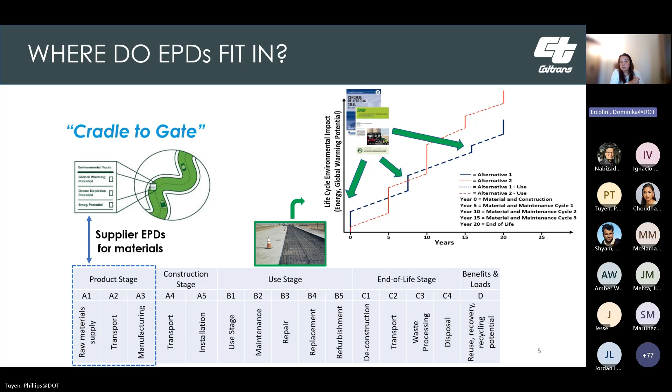And so what A1 signifies is the raw material supply. So when we're extracting those raw materials, any emissions that are related to that processing and getting those raw materials. And then we have our A2, which represents our transportation of taking those raw materials to the manufacturing and any emissions that are related to that transportation. And then we have the actual manufacturing process of those products and any emissions that are related to that. Next slide, please.

So I also wanted to talk briefly. Janesh mentioned the Buy Clean California Act. There's some similarities and there's certainly a lot of differences in what our current effort was in regards to concrete and asphalt. So the Buy Clean California Act was approved in 2017, and what this legislation requires is that the department, Caltrans, collects EPD data for structural steel, carbon steel rebar, flat glass, and mineral wool board insulation.

And so the way that we implemented this was in a phased approach where first we just wanted to see what EPDs were out there. That was phase one. Phase two, we started to require EPDs, but there was a potential option for a withhold if we weren't able to get that EPD. And now we're in full phase three, where we have limits that were set for us by the Department of General Services. So those EPDs need to meet certain thresholds.

Also, we are not allowed to install that material unless we get the EPD that meets all the requirements of the legislation. So it's like the next level to what we've done with the asphalt and concrete. So there's definitely a difference between the two efforts, but we thought it was important to share that there's this other thing. Next slide, please.

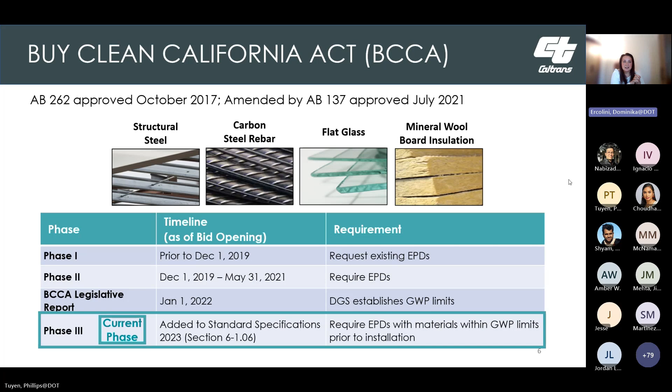So why is Caltrans interested in collecting EPDs? It's part of our goals for climate action to reduce greenhouse gas emissions, as well as be a recognized leader on climate action. And so within our 2024 to 2028 strategic plan, a couple of those strategies are to promote low carbon emission practices in project development and construction, as well as proactively collaborate with external partners to lead climate action. And so environmental product declarations are a way for us to better understand what kind of environmental impact we have through the materials that we're using. Next slide, please.

So that brings us to our current effort. So the Pavement Materials Partnering Committee Executive Committee put together a working group. This is a joint venture between the Asphalt Task Group and the Concrete Task Group, and they put together a group of professionals from the Caltrans side as well as the industry side, as Janesh had mentioned. And so you'll recognize 4 of those members are here today to speak with you. Next slide, please.

So as a group, we took various items into consideration when we were developing these specifications. One of those was the threshold quantities. And so this is actually similar to what we did with the Buy Clean California Act. Not every project requires an EPD. So those smaller projects, we are allowing them to not submit EPDs. But we also looked at the material quantities. We wanted to get as much information as we could. We were aiming for 90% of the materials. We wanted EPD data for that. But we didn't want the cost of developing an EPD to exceed 4% of the cost of the material itself. So it was kind of a balancing act, and we used data from previous projects as well as our industry partners to balance that out.

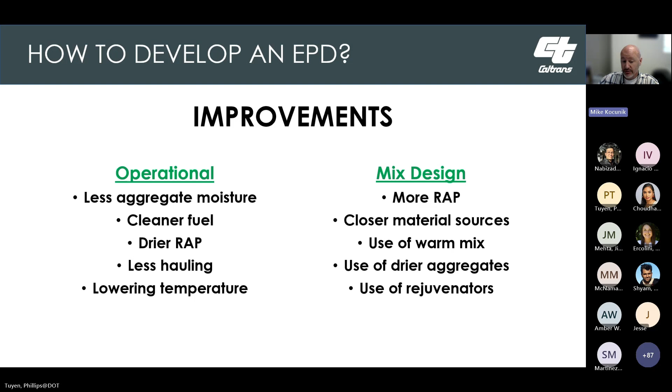So I'll be talking to you about how to develop a concrete EPD. Again, this is going to be a high-level process, as once you do start developing an EPD, you'll have plenty of resources at your disposal to help develop one. So your first step is to define your goal and scope. So make sure you understand what units of measurements you're dealing with and your system boundary. For Caltrans, the system boundary that they're looking for in their EPDs is a cradle to gate system. Again, cradle is where material is being extracted, and gate, for our reference, is your concrete plant where the material is being mixed.

Next, you will choose your EPD developer, also referred to as an LCA, life cycle assessment company. For concrete, we have two options. We have WAP and Climate Earth. And on the asphalt side, we have the Emerald Eco Label. And they will walk you through the PCR that applies for you.

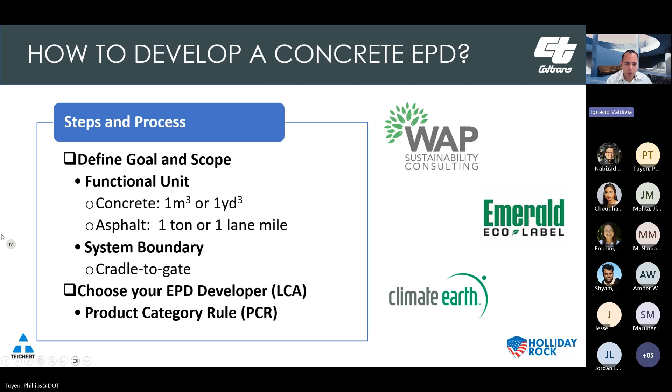The next step is to collect your primary data. So we'll start off with plant operations. This is collecting your fuel and electricity consumption. Then we collect transportation. This is the hauling distance for your raw materials. And then we move on to collecting all your suppliers. This could be cement, binder, SCM, aggregates, to name a few.

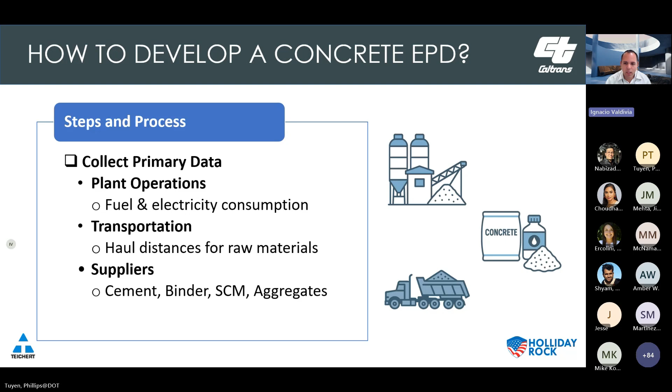Once you have collected that information, your EPD developer will send your information to be third-party verified. Once the information is verified, then you're able to publish. For our company, we use NRMCA as our publishing company for concrete, and the Emerald Eco Label for asphalt. We also have access to EC3, and the newest database, and why we're here today, is our Caltrans database.

So this is an example of the first page of our EPD. The EPD consists of 5 pages, but the first page consists of the majority of the information that you'll be plugging into the database, which we'll walk through in the next couple sections.

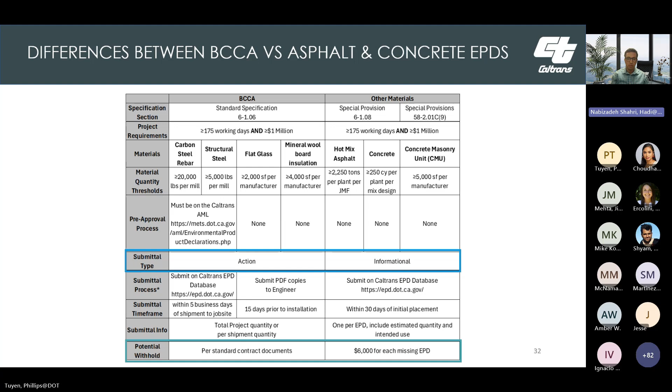Also, as I explained in the previous slide, there will be a $6,000 withhold for each missing EPD, but on the BCCA, there is no withhold. Either you meet the GWP requirements, or if you don't, per standard contract, you cannot install it. So those are the two major differences between BCCA and the new spec. Next slide, please.

Here I'm going to touch a little bit on the FHWA Climate Challenge. And I believe you have heard about that. So we understand, as Mike and Ignacio explained, publishing and getting an EPD might be challenging and require some sort of an investment. For that reason, we at Caltrans participated in 2022 in the FHWA Climate Challenge.

And as part of that program, Caltrans can reimburse concrete and asphalt plants if they go through that effort to publish and submit their EPDs. It's a partial incentive-based program, which means we reimburse $4,500 per EPD per plant, up to $18,000 per company. Basically that means 4 EPDs per company. And remember, this program will expire in January 2026.

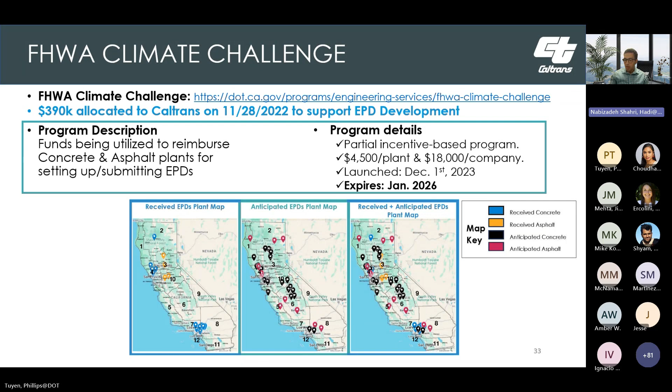So with that, next slide, please. I'm gonna give it back to Mike and Ignacio, and they're gonna walk you through the EPD database process to submit your EPDs. Mike?

Okay, let's go to the next slide, please. Okay, so let's let this stay up for a little bit. These 2 web addresses will be needed for you to input your EPDs into the Caltrans database. The first one is from DIME. You need to create a DIME account, as was said before, on dime.dot.ca.gov. Then use those credentials to log on to the EPD database at the second address, epd.dot.ca.gov. Next slide.

Okay, how to submit a new asphalt EPD. It's very, very easy. At any point, you can click on the help and support button, highlighted with that green arrow pointing to it. And from the drop down, it'll take you through anything that you're going to need. It's a very comprehensive guide, more comprehensive than the one you're going to get here in the next couple minutes, I can tell you that. So this is the first page that you'll see. Next slide.

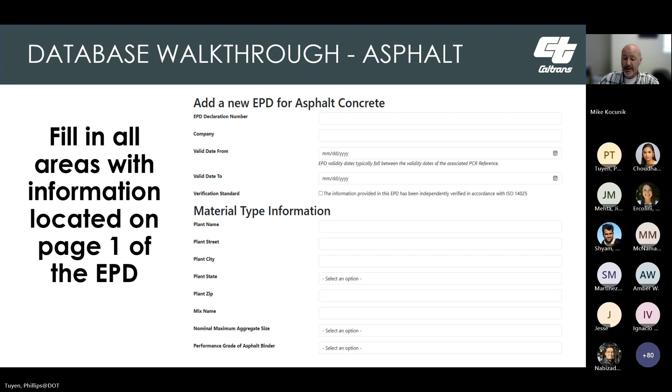This is an easy one. Choose asphalt when it says create what kind of EPD. Next slide. So what they want you to do here is just a little snippet of what kind of data they're going to be asking you for. Fill in all the areas with the information. All this stuff that you see here to the right is located on page 1 of your EPD. Next slide.

So we've talked about page 1 of your EPD. We've also talked about page 3 earlier. Page 5 of your EPD is the other very important spot, and that's where it tells you not only what your total GWP is, but where that number is coming from.

So what the database wants you to fill in, on page 5 of your EPD, is where you'll find the individual GWP numbers. And it's going to be asking you for metric, so make sure everything that you input is in metric. It'll ask you for the A1, the A2, and the A3 numbers. It'll calc that for you in the gray box that says total, and tell you that it's in the unit that's required, kilograms of CO2 equivalents.

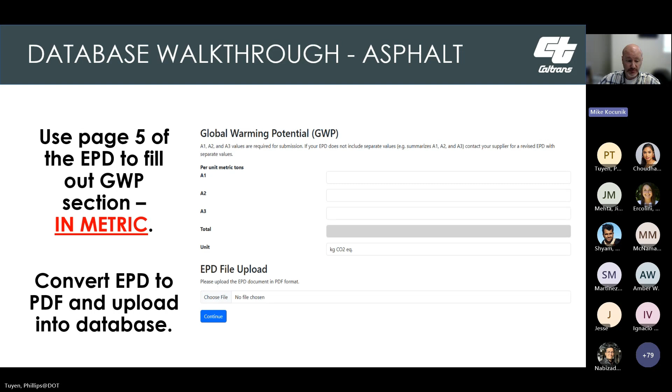All you have to do is go back in to the database, fix it, and resubmit. And then within a short amount of time after that, you should get the accepted email. At that point, your EPD is in the system, ready to be linked by its mix ID to a project that uses that mix. Next slide.

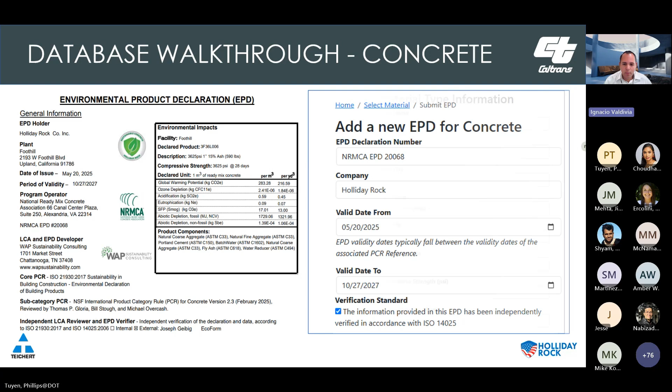Once you've gone through that information, you move on to the material type information. This section is asking for plant information. So your plant name and your address for the plant. The mix name and code. For this EPD, we have 3F36L006. And then the strength and age of maturity. So 3625 for strength, and your age of maturity for this EPD is 28 days.

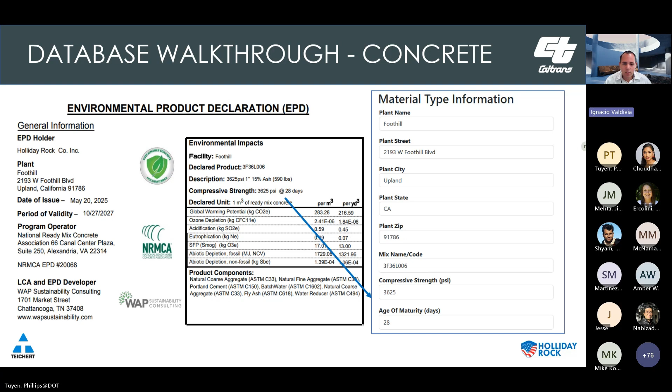Once you have uploaded your material, the next section is your PCR for concrete. And we have a subcategory PCR, NSF International, and all you have to do is verify that the EPD has that information, and you just click on the bubble to indicate that it conforms with your PCR.

The next section is the global warming potential, or GWP. We want to highly encourage you to ensure that your team understands what units of measurement you're inputting. So Caltrans in this section is asking for meters. EPDs can be in meters or yards. For our EPD, we have conformed it to meters. So ensure that the values are correct.

So let's get started. Our A1 module is 268.48. Our A2 module is 8.66. And as you can tell, as you're inputting your values, the total on the web browser is being updated. So currently 277.14. And the A3 module is 6.14, which gives us a grand total of 283.28. And this number matches with your EPD GWP value.

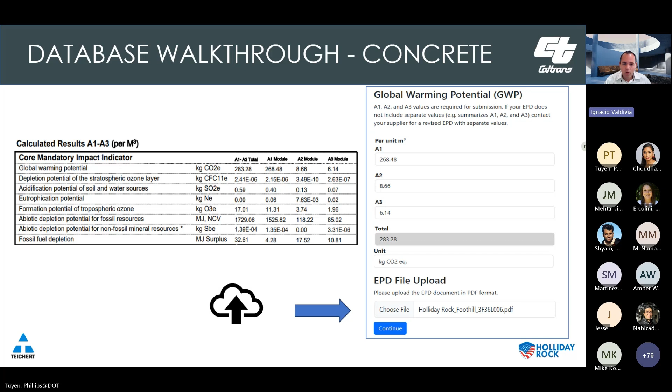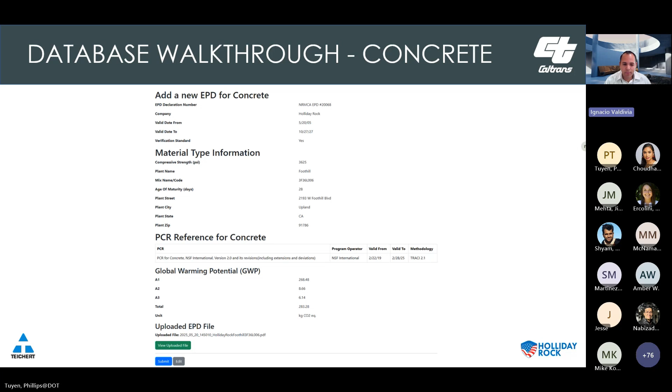Once you have typed in your values, the system will ask you to upload your EPD. Caltrans asks you to please upload a PDF format of your EPD to ensure that it is accessible for them. Once you have uploaded your EPD, it will give you a screen to ensure that you review all the information that you have inputted. Then if everything looks great, you will click submit. It will ask you one more time, are you sure you want to submit your EPD? And you click yes or submit. And then it will direct you back to the dashboard where it will show you the EPD that you just submitted. It will show as pending.

As Mike mentioned, if there are any errors or any revisions that need to be taken care of, you'll get an email stating that your EPD needs to be reviewed or revised. If your EPD gets approved, then you will get an email saying that it's active, and you'll log back in to your dashboard and you'll see your EPD status says active. And at this point, the contractor can come in and submit project information. So let's take a look at what the contractor will see and type in.